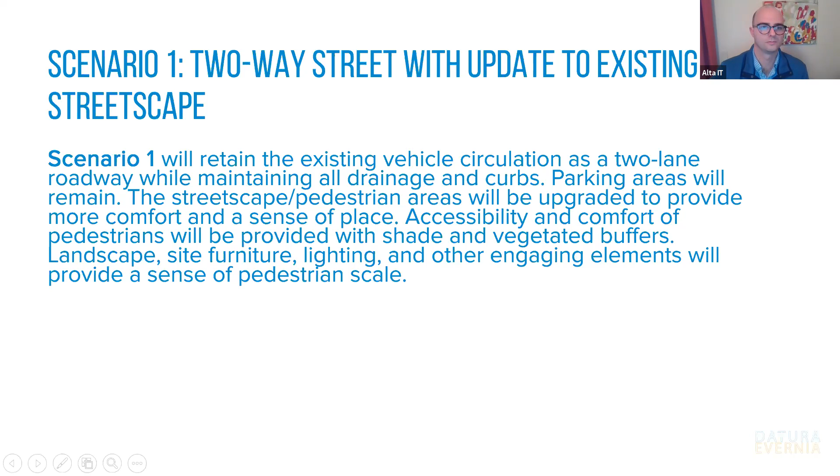We also developed these diagrams to begin to describe what's going to change and whether there'll be more space allocated or less space allocated to these different types of features of the street. So in this scenario, the only thing that's going to change is adding some minor space additions for landscaping. Like I said, maybe changing some of the trees from palm trees to some type of shade tree, and maybe reprogramming some of the on-street parking space, say for loading or some type of access to the adjacent buildings along the street.

Scenario 2 is a 2-way shared street concept. So what that means is that it will retain the existing vehicular circulation as a 2-lane roadway. However, the configuration of the curbs will change and the street will transform into a shared street. So you can think Clematis Street streetscape that was recently done, or the new streetscape along Rosemary Avenue.

Vehicle speed and volume in this part of town make shared streets a feasible option by removing the formal distinctions between spaces dedicated to pedestrians, bicyclists, and motorized vehicles. The street is shared by everyone, with each user becoming increasingly aware and respectful of the others.

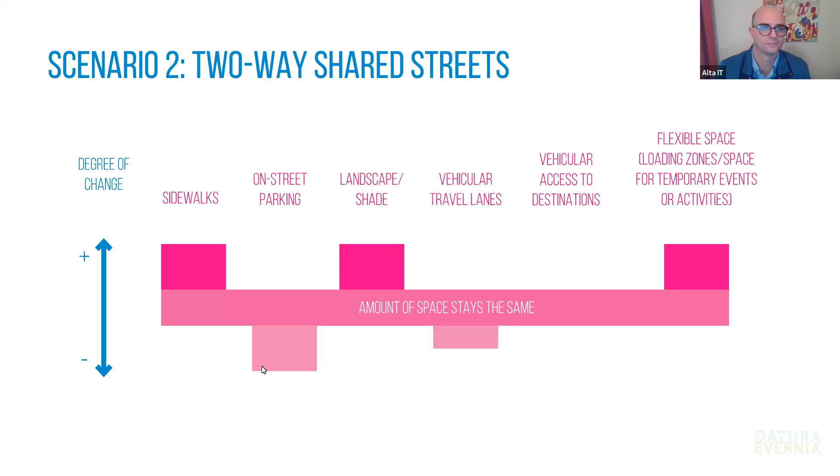And scenario 3 is the most drastic in terms of reallocation of space. It's converting Datura and Evernia Street into one-way pairs. Scenario 3 will convert from two-way to one-way. As I mentioned, it will also become a shared street.

By removing a travel lane on Datura and Evernia, this allows maximum pedestrian space, including the integration of meaningful green space. There are opportunities to create a linear park along the street and more of a destination adjacent to the businesses and residential areas. A single lane conversion will provide space for shade trees, seating, and more extensive landscape areas. The additional space also allows for the most flexibility in maintaining on-street parking. There are other one-way streets downtown that would integrate nicely with this scenario, such as Dixie, Olive, and Narcissus.

And as I mentioned, the trade-offs in terms of space is drastically changing and reducing the amount of on-street parking, removing one vehicular travel lane. And what that does is it frees up space for more sidewalks, shade, and landscaping, and a lot more flexible space. It also impacts vehicular access to destinations, so that might be a trade-off that we'll need to consider.

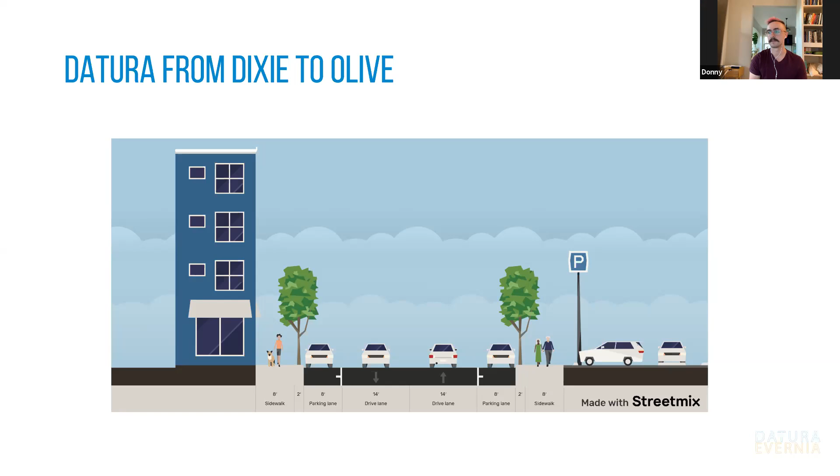Next slide. Actually, Brad, can you move forward 2 slides? My apologies, they're out of order.

And then for Olive to Narcissus, very similar cross section to the previous block. The trees here are palm trees, so that creates a bit of a different setting. And in general, the buildings tend to be a lot taller and they tend to be continuous along this block, which creates a very narrow kind of sensation when you're on the street. Makes it feel a little tighter than some of the other blocks.

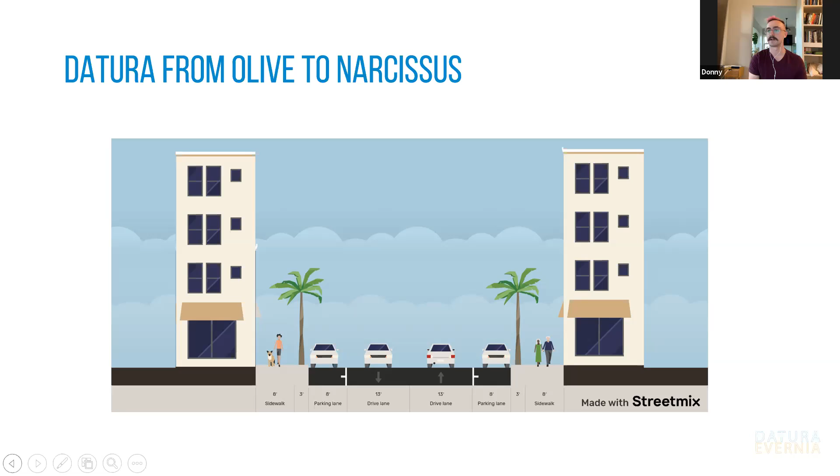Yes. Great. So this scenario is the two-way street with minimal movement of curbs. And what we've really been thinking about here is how we can activate the space as much as possible with doing very little to the streetscape itself. From Dixie to Olive, we have a little bit more of an opportunity to play around with how that space is allocated. Those wide lanes and a bit of a striped median in between them allow for some flexibility. Generally, the alignment of the road should probably stay the same in this scenario.

In this image, it's playing on a little bit of a wider sidewalk on the south side of the street, but still using that curb-to-curb space for parklet spaces. And I'll be showing some images of parklets in a minute, but essentially using that space still within the curb-to-curb roadway to activate it and to enact changes that can be temporary, but they can also be very finished and very wonderful and activated and be at the same level of the sidewalk.

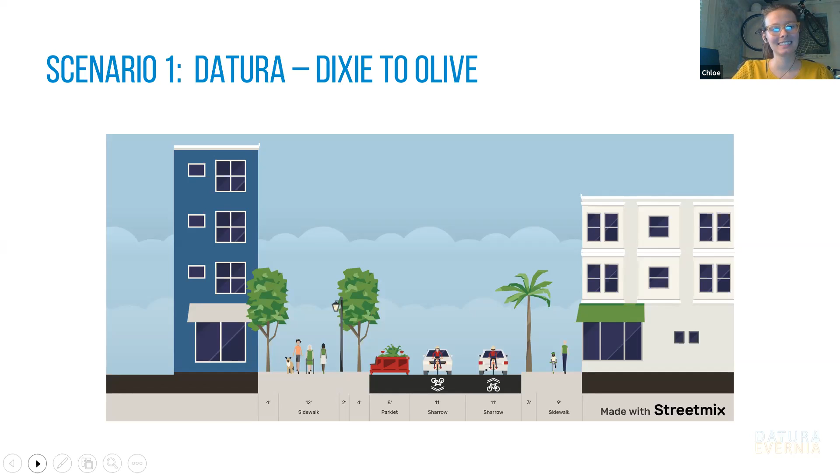For Olive to Narcissus, we, like Donny said, are dealing with a little bit more of a narrow right-of-way here. The lanes are already pretty much as narrow as they can go, but we have that flexibility again with the parking. So in order to really activate the street, utilizing the parking in this block is pretty crucial to expanding those sidewalks, expanding the feel of the general passages of the street, and not making it feel so car-centric.

Cars on the other side of the sidewalk will also block a lot of activity that you can see around there. So should there be furniture alongside the sidewalk, you can really activate that space and make it feel more like it's for the people that are engaging in the area. Like Donny said as well, the scale is very different here. The buildings are tall, so the palms kind of enhance that, and perhaps we want to see some interventions that'll keep it more pedestrian scale.

So here you can see canopies introduced for shade, but also aesthetics and for feel of the space. There is supposed to be a green wall on this section, so you can see a little bit of that there. It's already in the makings to be very cool. But again, just that all the activation elements, there's a lot that you can do with a little amount of space. So we can see that in the next slide.

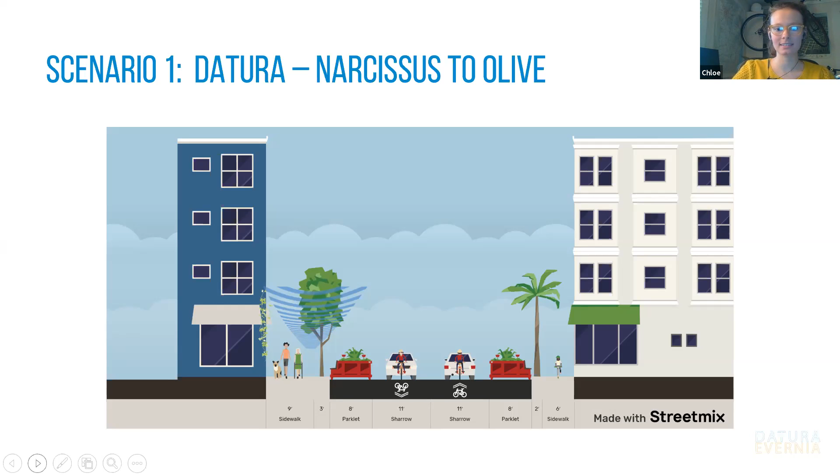Again, whether it's temporary or semi-permanent or permanent, there are a lot of changes that can be made with the space, even if it's not entirely changed with curbs and widened and completely open to pedestrians only. There's a lot that you can do here. You can mess around with the pavements, the texture of the pavements, the painting that you can have here, the striping. You can do it in the roadway or on the sidewalks themselves. There's a lot of different options for going about that.

All right, well, I think that brings us to scenario 2. And moving on, we're looking at a two-way street that looks at more of a full curb or full right-of-way redesign. So moving curbs, and in the case of these streets, looking at potentially eliminating curbs. So a theme that you'll see on both blocks is bringing in something similar to what is on Clematis and what's on Rosemary, which is more of a curbless street.

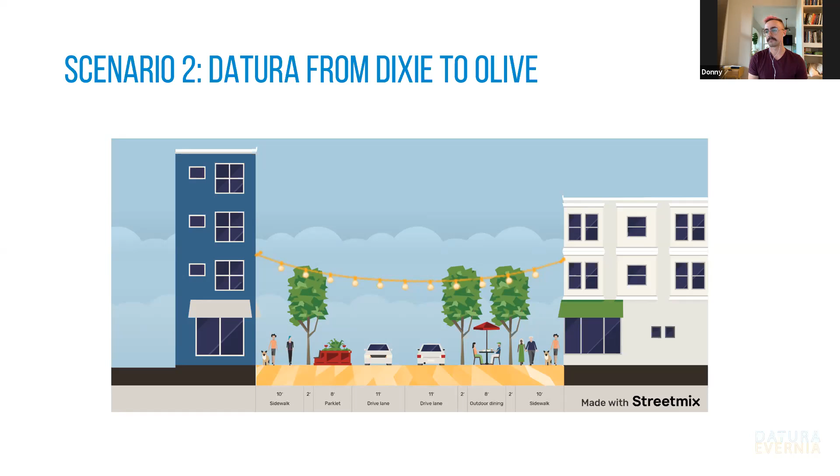There's also other flexible options, things like parklets that could be introduced, or just additional landscape to further help green up and cool the space down a bit. Next slide.

So this is looking at Olive to Narcissus. And so Olive to Narcissus, as I mentioned before, is different from the other block. This one has the really tall buildings, which present more of a challenge for creating a comfortable experience because you feel very small and constrained in between them and the cars.

And so what we wanted to do here, similar to the last block, but even more so, is really create this overhead plane. Again, this could be a formalized shade structure that's strung between these tall buildings. There could be overhead lighting, and I'll show some examples of that in a few slides. There's also the option for flexible amenities like food truck space, or it could be reconfigured just to have a double wide sidewalk, which may be needed in areas where we're expecting more pedestrian demand. Next slide, please.

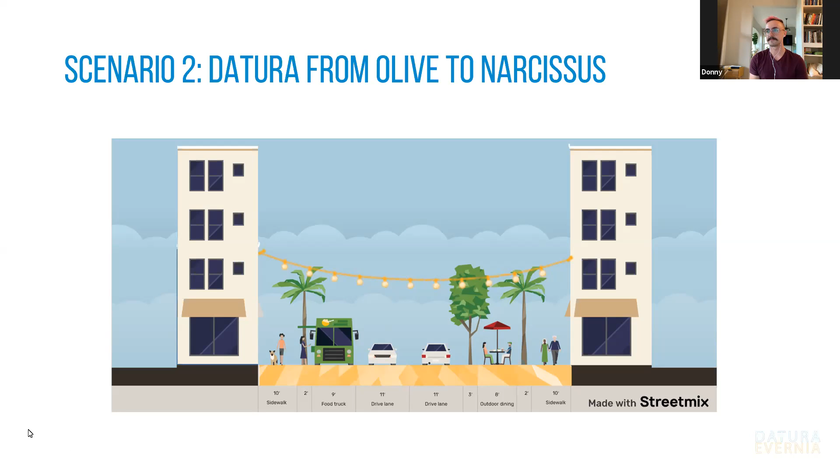So at the heart of this concept is this idea of shared streets, where there is space for cars, and in some instances it's entirely dedicated to cars. But the idea is that it's not rigid and there isn't a ton of space dedicated to cars. So you see in these examples, in the top left one's Clematis, the paving really stretches across. It creates this flat surface. Everybody knows where they should or shouldn't be based on what mode of transportation they're in. But there's subtle cues, things like trees, vegetation, slight changes in paving that really cue you in.

It can be something very historic looking, like the image on the right could have pavers with embedded street trees in it to help define the spaces. Or you can get really funky and crazy with it. Something like a painted street or a colorful paved street like the bottom left is another example of a shared street, just with a different surface application. Next slide.

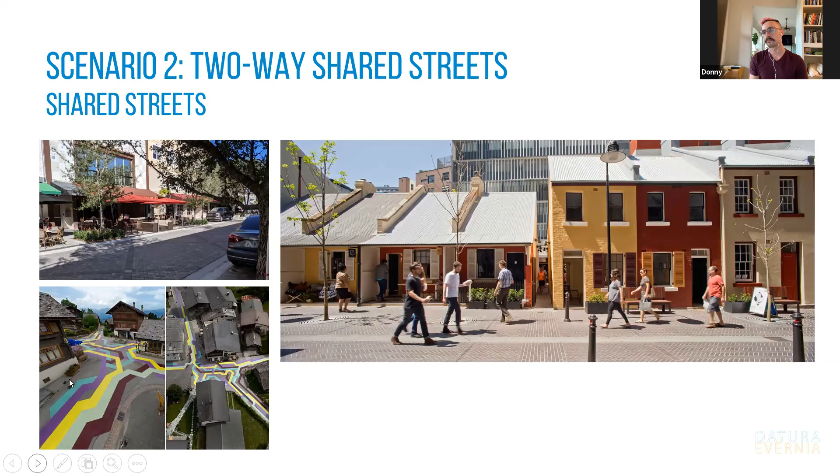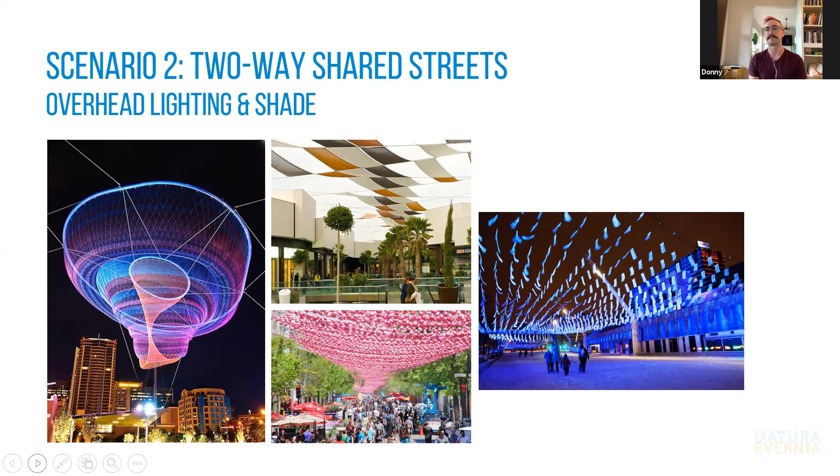It could be classic hung bulbs across the street or different kinds of LEDs. There's also other creative products like solar lights that could be strung to create really dynamic shows at night, which would further enhance the character of the street. And I think now we're gonna pass it to Emily, who'll talk about one-way streets.

Thanks, Donny. So as Donny said, this scenario is exploring what the street could look like if we took out a lane and just had one-way movement on the street. Specifically, Datura would be an eastbound street, so it would head towards the waterfront, and then Evernia, the pair, would head westbound towards the commuter rail station, just to orient you.

This section in particular, from Dixie to Olive, has a lot of vacant land on the north side, or not necessarily vacant land, but underutilized, and a lot of offices and businesses on the south side that have more modern facades, whereas the north side has more historical facades. So we wanted to play on what we could do with all of the extra space when we just have one drive lane.

And part of that is looking at a linear park that draws you down the corridor towards the water, and creating a microclimate on one side of the street with all of the subtropical plants, shade trees, and little pockets where a person on their lunch break could eat with a friend, just take a phone call, little pockets as the pathway undulates down the road.

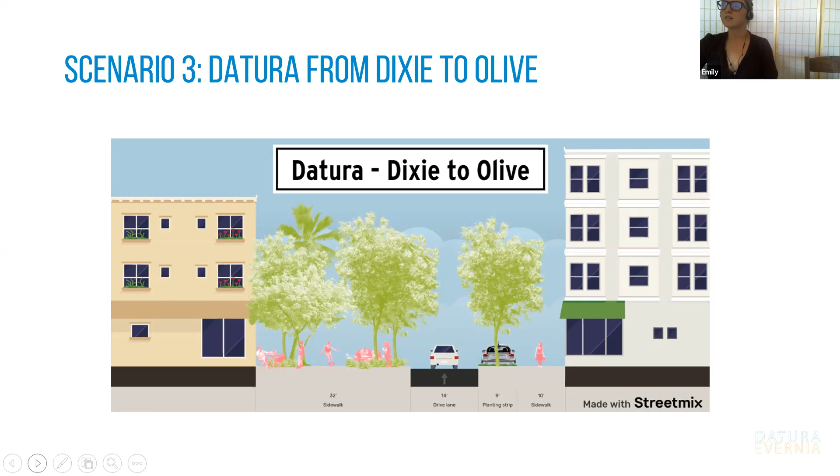This next block, Olive to Narcissus, is a little bit of a different take on the same concept. We wanted to look at a curbless option, similar to what Donny's group looked at. And we wanted to look at what if the drive lane curved as it went down the block. It wasn't just a straight road, but it gives the opportunity to focus the extra space on places where the land use could really make the most of it.

And it gives great opportunities for plazas in the middle or on the side of the road, and it really helps fill in the tree canopy because you just have 14 feet of drive lane, and the rest of the space can be filled in with trees and activation. I just showed a couple of different ways you could use that space. So you could have some interesting street furnishings with a shade structure overhead. You could have outdoor dining in front of restaurants.

So especially in front of existing restaurants, we wanted to maybe curve the drive lane to the other side of the road so that restaurants could use it for outdoor dining and have more space for tables and for activation and life. There's also the opportunity to have public art or play space in the extra space. As you can see in the bottom right concept, we're showing a public art sculpture you can interact with, and different vegetation options that could exist.

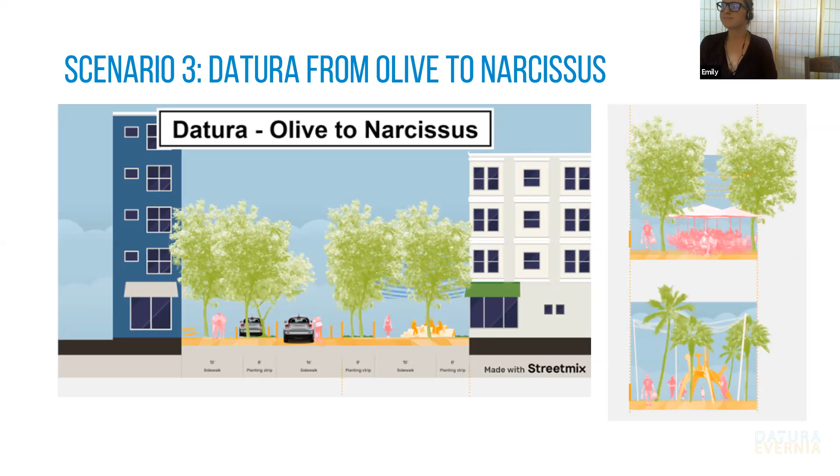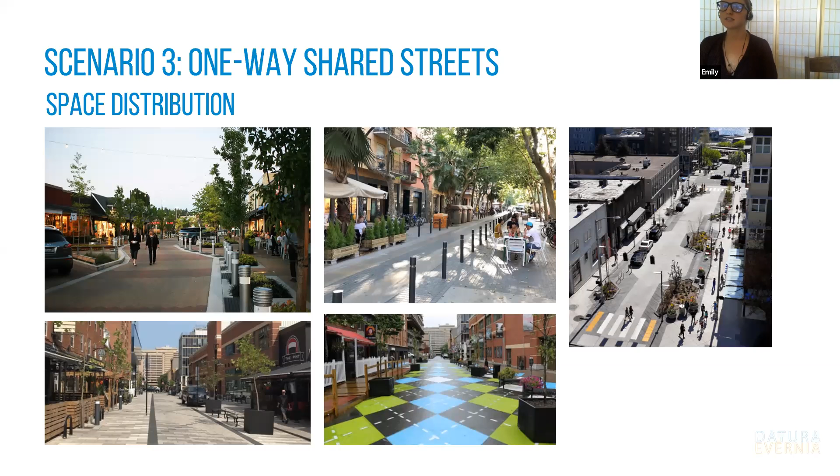This one looks at two of the blocks. The two images on the left kind of work for the Dixie and Olive Street concept with focusing the pedestrian space purely on one side as opposed to alternating back and forth like the last picture. When you focus it on the one side, it kind of gives this linear park, this continuous green space that pulls you down the corridor, which is really wonderful. And I think it creates a lot of opportunities for redevelopment and adjacent land uses. And it helps connect some of the green spaces that already exist.

So there's the amphitheater down at the end of the corridor, and then there's the Zen garden at the corner of Dixie. So you kind of have this emerald necklace sort of created when you have this big green passageway connecting all of the parks that already exist. The last image just kind of shows how when the road curves in the block, it creates these pockets where you can designate for activation and bigger pockets of green space. And there's just a lot you can do with the extra space and a lot of freedom when you have the one-way configuration. Next slide.